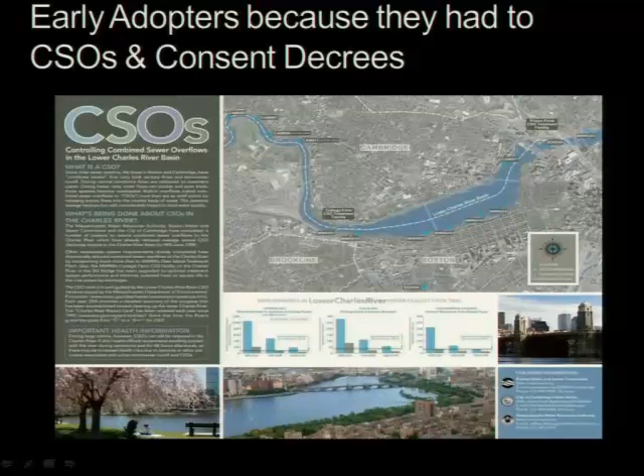People with CSOs and consent decrees are adopting our stuff like crazy, these bigger cities. We also have early adopters because they had to under strict stormwater permits. So Southern California, they can only drain 5% of their stormwater untreated back into the curb and gutter. Other early adopters are the Pacific Northwest and Bluffton, people whose economic development and identity are closely bound and pressured by stormwater.

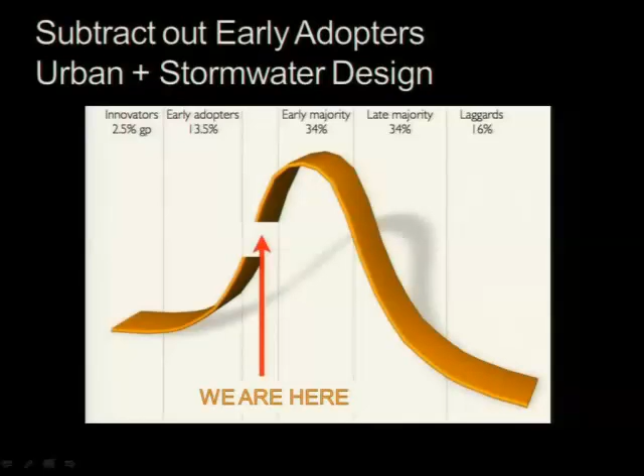So once we subtract out our early adopters, who do we have left? Well, we are at something called the chasm. We have got to cross the chasm. So how do we do that?

Well, the solar industry has already looked at this chasm, and they found out that after you subtract out the early adopters, their early majority is just like ours. They're more skeptical, more driven by upfront costs. So this life cycle analysis, forget it. They're driven by reliability, but they're more open to advice from peers rather than experts.

So what does that tell us about our early majority? Well, we need to find out that definition. We need to figure out what peer pressure is for this group of people, and we need to figure out how sensitive they are to cost. So when we poke them in that soft underbelly that's going to get them to go our way, where are those pressure points?

If we start defining who our early majority is, let's look at small cities and counties, people who are MS4s, but not necessarily big cities with CSOs and the bigger problems and the better grids and things like that. Well, they don't have a lawsuit to point to. They don't have consent decrees pressuring them. They may have Tea Party issues, and they're taking on sustainability, but they're also struggling with how you handle the communications of hidden benefits and avoided costs, but we all know that.

And they also have a habit of dumping their stormwater into the rivers for free. So this whole 'we're going to save you money' thing—what's less than zero, really? So we need to figure out new ways to present budgets, not just current year, but throughout the life of the project, because upfront costs are sort of our bugaboo. We need to find their peer cities and counties, and we need to figure out ways in our own communities to link runoff to our identity, because identity is a big deal.

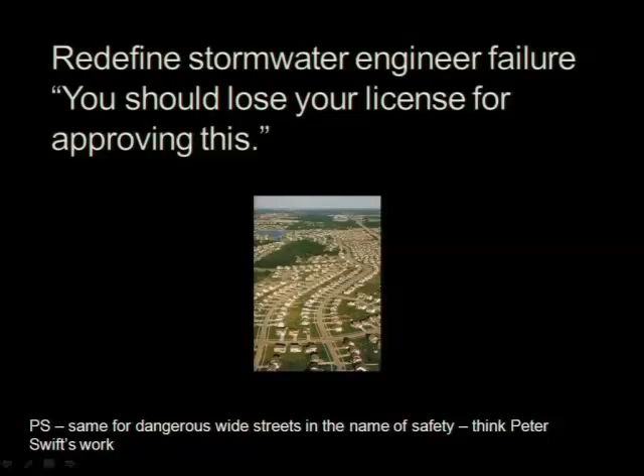The other thing that's really important since I moved to the suburbs is we talk a lot about champions. Mayors are champions. Once we go to our early majority, we are dealing with county boards and small city boards. They have 5 people. We've got to learn the politics of the 3-2 vote. We've got to stop relying on one champion.

Word to the wise: HOAs matter. We smart growth people don't like HOAs because they're kind of sprawly, but they matter, and they are hotbeds of innovation in Sarasota where I am. They're totally into peer pressure. They have huge maintenance budgets, and they're great for collecting data. But even though we talk a good game about politics, we still need the numbers, so we need things like Banking on Green. ASLA has a great case study bank, and we need organized information.

In case you thought you were missing tactical urbanism, I'm going to cover that here. This sort of thing begins to change the tone in the community. Stormwater is cool, and green stormwater is great. These little tags, guerrilla gardening, like pothole gardening, putting flowers in your stormwater grate so people all of a sudden pay attention to it. This is cheap promo for my other one. Talk to me afterwards if you want to, because I'm going to tee up Lynn, who is really going to talk about the policy framework for this next group of people that we need to come our way. That's it. Thank you.

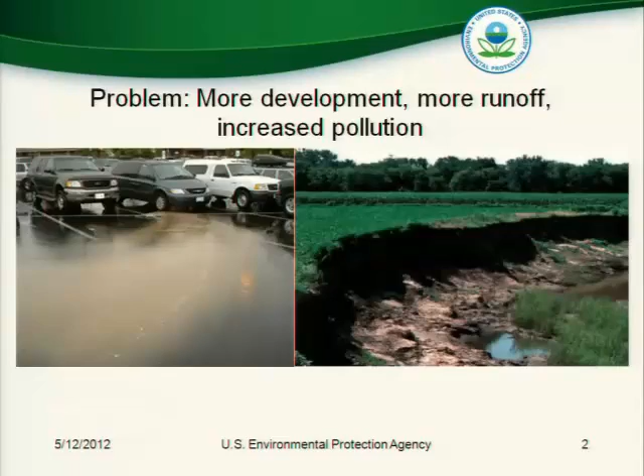As many of you know, EPA publicly said that we were going to propose a stormwater rule in September of 2011. The rationale behind it was simple. What we were seeing across the country is that the more communities developed, the more runoff we had, and the more increased pollution we had. With the increased pollution, it actually cost quite a bit for communities to begin to address it. So as part of a settlement agreement with the Chesapeake Bay Foundation, the EPA said that we would consider - pay attention to my words - consider a national stormwater regulation for new development and for redevelopment, right?

As part of this measure, it was looking at managing stormwater on site through green infrastructure approaches. What this rule is considering to propose is, one, getting the land use right. Let's start there. There are, I think, 50,000 abandoned lots - that was something Ellen Dunham-Jones said recently. If you put development on existing development, that is your number one water quality strategy. You're a mayor, you want to experience the benefits and opportunities associated with growth, right? But you are facing stormwater problems - direct your development to already degraded areas, right?

There are a lot of opportunities. As I already said, Ellen Dunham-Jones said there were about 50,000 of these abandoned strip malls and single-family malls. There are these freestanding malls. The GAO, the Government Accountability Office, estimates that there are almost 500,000 brownfield sites. This is prime property that already is served by existing infrastructure. If you come away with nothing else, the best water quality strategy that you can do is direct development to your already degraded places.

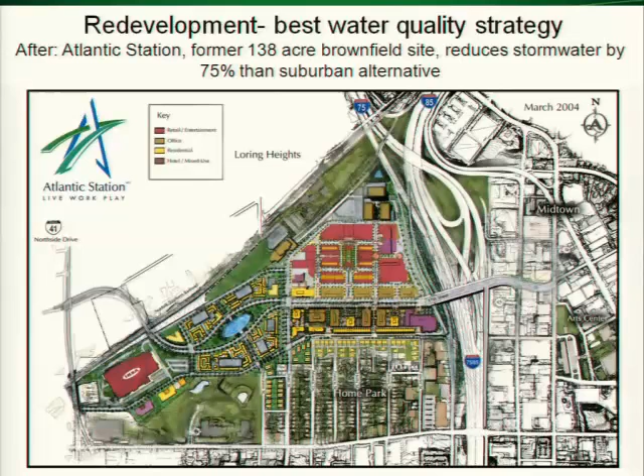So you're a developer, you're worried about your bottom line: that's 75% less stormwater management that you need to put in just with where and how you developed. So part of it, as we discussed, is directing the development to an already degraded area. The second part of it is how you're developing the site.

Compact mixed-use development further reduces your water quality impact, and it makes perfect sense. If you're consuming less land because you're creating a more compact development, again, you're generating less stormwater. If you do your mix of uses and you begin to weave in transit, you're reducing how much you're driving because you're increasing walking. Reducing how much you're driving, pay attention here, technical term coming up, you're reducing the amount of gunk that cars leave on the road.

Less gunk on the road means less gunk being washed off into the streams, right? Less gunk on the road, fewer cars driving means less air emissions that are falling into our water bodies. 1/3 of the nitrogen in the Chesapeake Bay is from mobile sources. In other words, we will never be able to get to the levels that we're trying to in the Chesapeake Bay unless we start driving less. How do we start driving less? We start building communities that are walkable, mixed use, and are on already degraded sites.

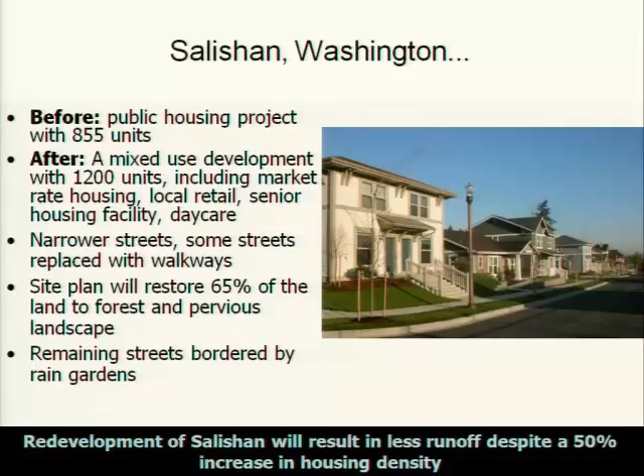And there are a lot of examples. This is a project that I did in Covington, Kentucky, northern Kentucky, right on the other side of Cincinnati. They were facing a consent decree. So Covington came to us and said, how can we sustainably grow? How can we grow our economies when we have to dramatically reduce our runoff? And what we first said is get the land use right and then green the heck out of it. Just another example of the types of tools that you can begin to integrate into your development.

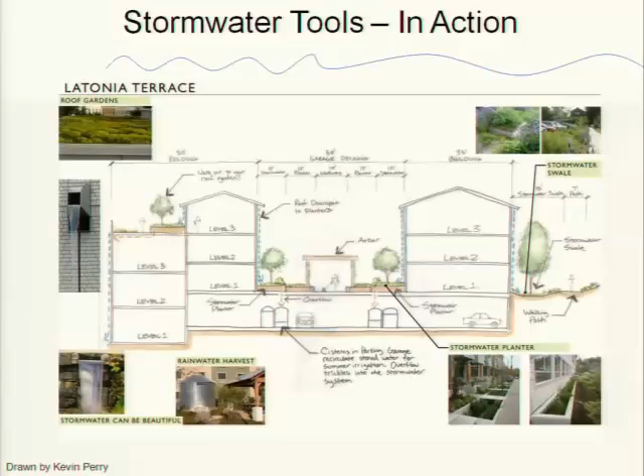Again, the rule is going to propose that some percentage of your stormwater will need to be managed on site. And so we'll really be able to draw from the wide range of work that has already been done. But as I said, the rule was supposed to be proposed in September of 2011. If you look at the website now, we're in May 2012, it said, look here shortly for a new date of when the rule will be proposed.

So step back for a minute and imagine that you're the President of the United States. You're Obama. All right, you're in the White House, and the housing industry is in the toilet. You need to worry about the economics of this country. And last year, your Environmental Protection Agency had just put out a construction and development rule. So any additional regulation that will cost the development industry something is going to make headlines and is going to hit the economy. Just look at it from Obama's perspective. So from our perspective, the EPA, what that means is that our cost-benefit analysis has to be even tighter. And that's what's taking the time. That's the rulemaking process.

But what can we do in the meantime? Let's go directly to what Lisa was saying. Well, let me back up. So once the rule is proposed, it's probably going to be another year, 18 months while we take in comments, and then probably another several years before it's finally implemented. So from this point on, figure 4 or 5 years before we get implementation. So what can we do in the meantime? We can change state standards.

Virginia and Tennessee have both modified their state standards to adopt the very type of permit that we're considering at the federal level. And in fact, they'll be exempt from the federal rules because everything that they've proposed is already stricter than the federal standards. We can plan where and how we want to grow. This becomes really important when we know where we want to grow.

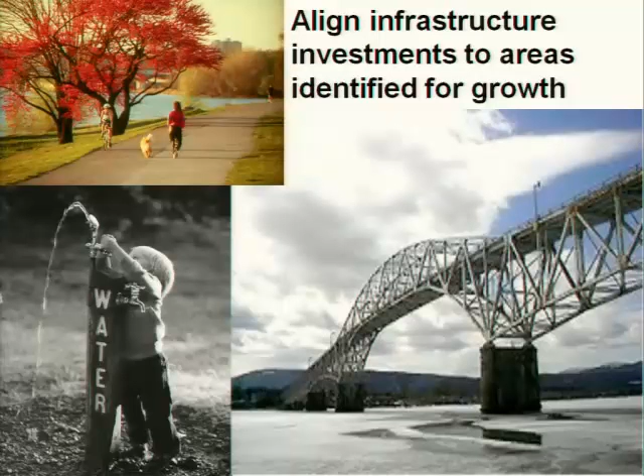Now I've got to wrap up. When we begin to align our infrastructure investments, we figure out a way to begin to integrate our infrastructure. And a great way to start integrating our infrastructure is how can we use our transportation street network to start managing our stormwater. The city of Emeryville, they didn't change their codes, but they did establish guidelines on what new development needed to look like.

We could also begin to change our codes. Again, code for parking maximums, code for narrower streets, code for mixed use, code for redevelopment. These all have dramatic water quality outcomes. And then finally, get the land use right, green the heck out of it. We need to add texture. Stormwater management is something that can actually be beautiful and add texture and distinction to our communities.

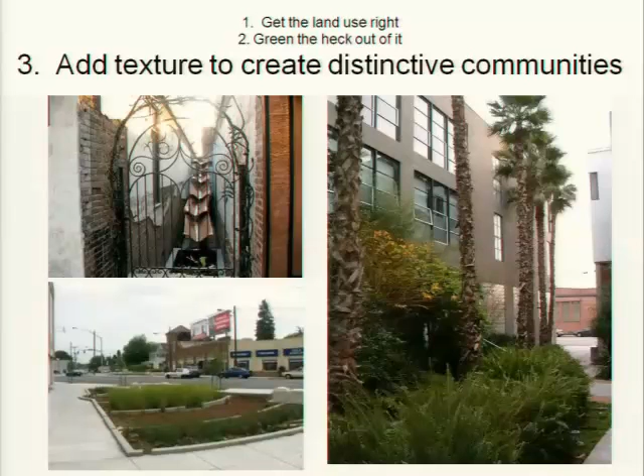And when we begin to do that, when you can see it on the street level, you begin to value it. When residents value it, the local governments will invest in it. When local governments begin to invest in it, you begin to do it more. Which kind of goes back to my opening statement: if we begin to do this and people begin to invest in it, do we really need a stormwater rule? Done. Thank you.

So I was the first person to go over. I think you owe Lisa the beer now. I do. And it's Steve Coyle that is next.

Okay, so my name is Steve Coyle. I'm an architect. I'm not an expert in stormwater, but as an architect and urbanist, I need to know enough about this so I can have a positive impact. So I'm going to briefly talk about an EPA greening grant project that's in the Southwest, specifically in Phoenix, and the whole Southwest, as you know, is trending to reduce water. They'll have less water to work with in the next 50 years.

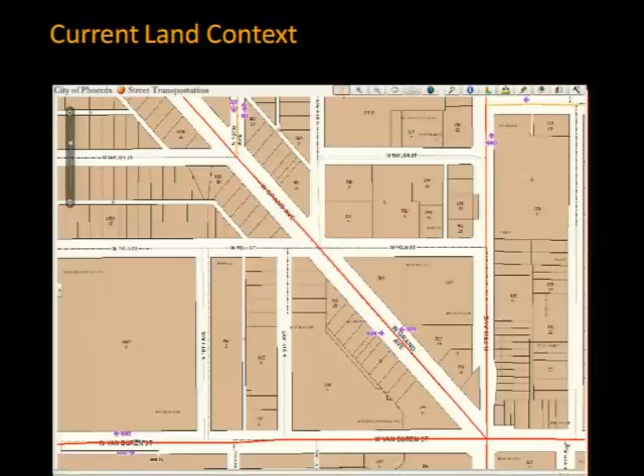This is the area here, Lower Grand Ave in Phoenix. It's a couple of miles of arterial, and as part of the greening grant, we did a 3.5-day charrette that I led, and you can see the evolution of the design of the streetscape, and here's what it looks like, the context. It's one of the older routes that crosses I-10 to the northwest, and then it joins Van Buren and 7th Ave in Phoenix, for those of you who know the area. So our section is a relatively short stretch of what some people call a corridor of crap, but it's a vital link both for mobility and economically.

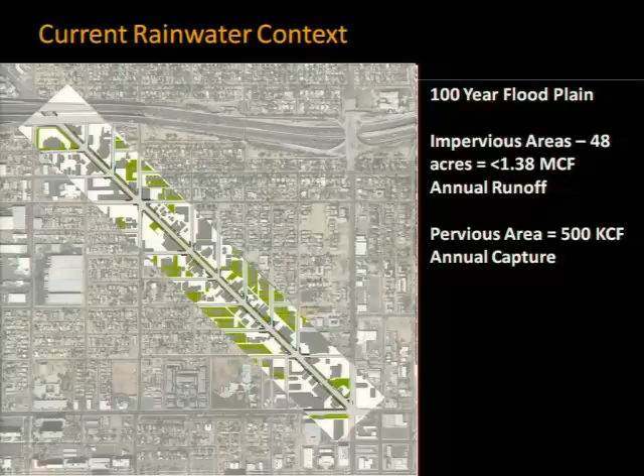And here's some of the rainwater information. So you can see some of the existing infrastructure, the massive infrastructure. Most of it is surrounding that corridor, and here it is. Here's the 100-year floodplain, you can see in the light blue to the left of that photo. Here's the impervious area, about 48 acres of impervious area. Some of it buildings, but most of it surface paving, parking, and so on. And then the pervious area is only about 500. That would be 500,000 cubic feet of annual capture. So you can see we have a deficit of pervious area and a predominance of impervious area.

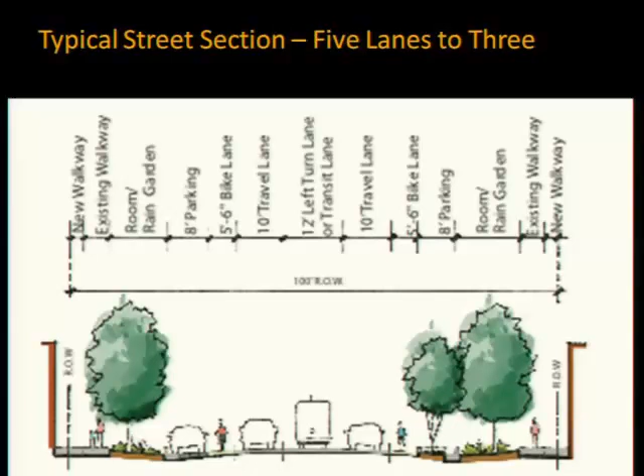So we're trying to green or to improve the streetscape, but also we're trying to handle stormwater. So the first move is to go from 5 lanes to 3. As you can see here, we did it without really reducing much the capacity, the throughput capacity, because it's mainly throughput. There's not many right or left turn lanes. So the thoroughfare design goes from this to something like this, going down to 3 lanes.

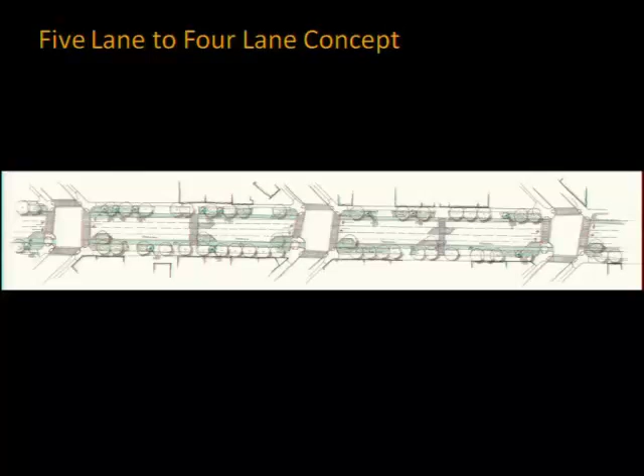And so going from the northwest at the I-10 to the overpass to the southeast end, I just wanted to show you the streetscape. So here what we've done is we've added street trees, rain gardens, bioswales, and we've reduced paving significantly, especially that centerpiece, which doesn't exist now. So what we're trying to do is really reduce the amount of overall impervious surface. The typical street plan is adding street trees, adding these rain gardens, and reducing paving by removing 2 lanes.

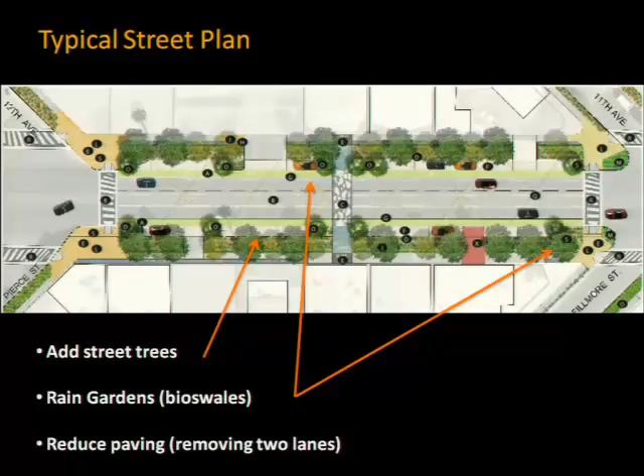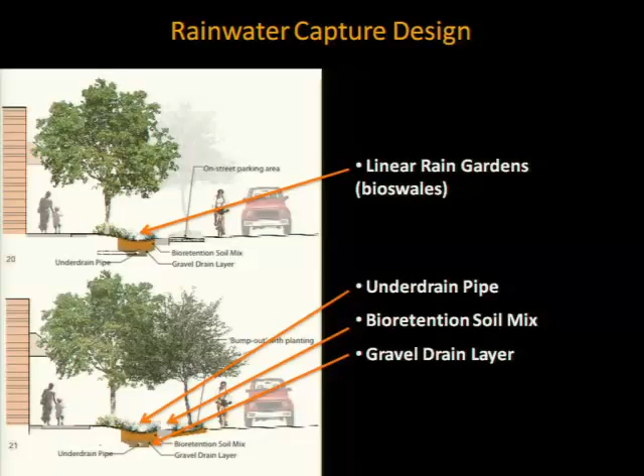So this is very simple. I mean, this is not gold-plated. This is a basic approach to moderate cost rainwater capture. Rain garden design here. What we've done is design these linear capture areas with on-street parking and a bike lane. And the capture design consists of these linear rain gardens, under-drain pipe, and a bioretention soil mix. So pretty standard stuff for many of the arterials, particularly in the southwest. We also use a gravel drain layer at the base to help the infiltration.

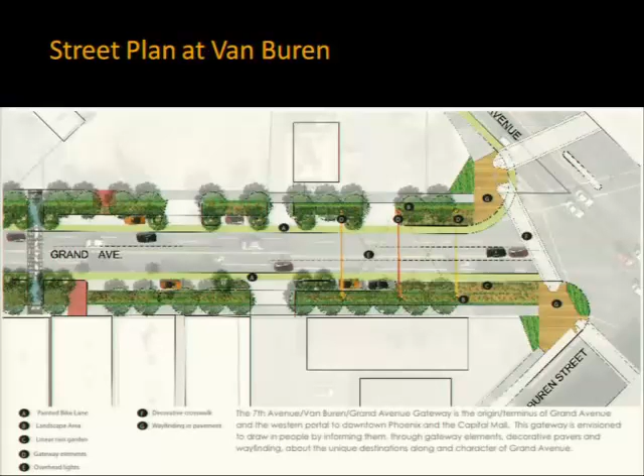A typical street plan at the intersections looks like this, where we've gone from essentially a giant paved area at the intersections, and we've tried to introduce or extend those capture areas towards the intersection. And then when we get down to Van Buren, which is that giant intersection, we've done the same, tried to introduce more capture area, more greenery, and at least try to provide some decent presence.

I'm an architect. I'd like to do it with buildings, but the buildings are not going to happen yet, and it's this incremental growth. So we've seen that private investment follows capital investment. So hopefully, by greening the street, we improve the capital investment, extending the sidewalks, and some lessons learned from this. That little cartoon says it's not what you think. The idea is collect rain before it reaches the car park.

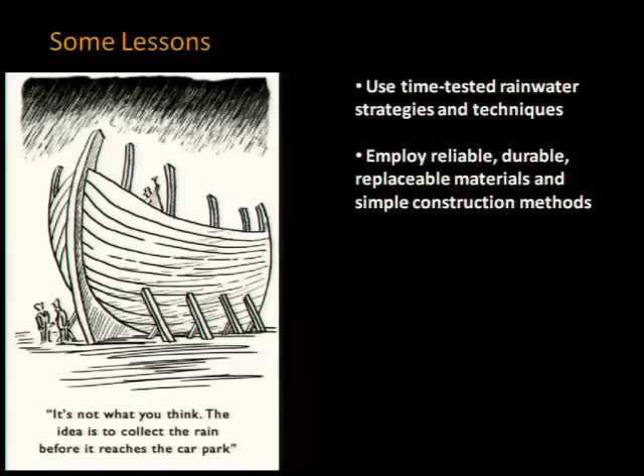Anyway, so we're trying to do some very simple, pragmatic solutions using time-tested rainwater strategies and techniques, employing reliable, durable replaceable materials, stuff that if it gets damaged can be replaced easily, and simply making the designs adaptable for future modifications. So if you have some intensification of uses, removal of curb cuts, you can make those rather easily, and make designs that address more than one issue. Just those rain gardens, they reduce heat island effect, they capture rainwater, and they're nice to look at.

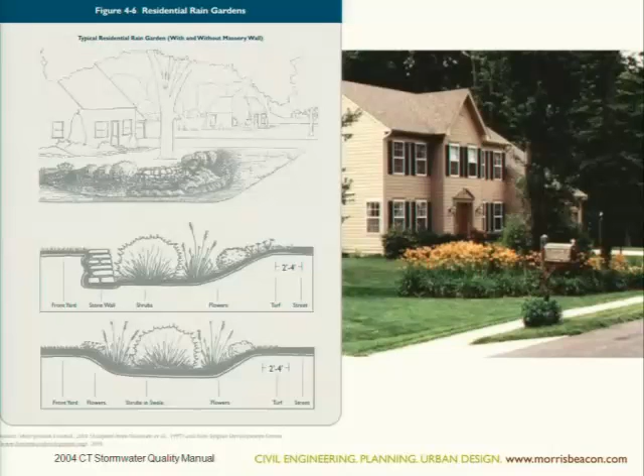LID, we see you manifested in the bioswales and bioretention, the rain gardens and rain barrels, the perforated pipe and the pervious pavement, the green roofs and the greenways. Perhaps more important, over time you infiltrated the regulatory system, creating a legacy in the stormwater manuals and design guidelines now being enforced.

Where LID is the core guiding principle for developers and designers to tread lightly on the land. Shown here is a greatest hits list from state stormwater manuals in New England. LID, we were so proud.

But the time has come for the next generation to evolve and grow from your foundation. It's not entirely your fault. In recent years, you associated yourself far too much with some unsavory characters like sprawl.

Shown here, a layer of LID technology over the same old land use patterns, straight from the New Hampshire State Stormwater Manual. And LID really hit it off with conservation subdivisions. You gave us transcendent solutions such as going from 2 cul-de-sacs to 1. Here, from Rhode Island's brand new 2010 State Stormwater Manual, as a solution for laying light on the land.

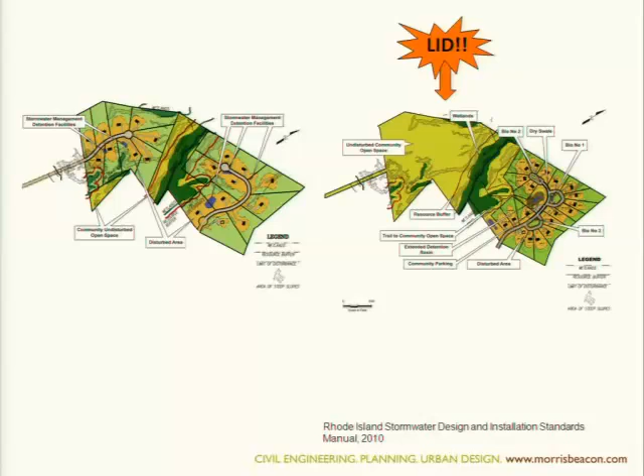We're facing a new world these days, where smaller scale infill and redevelopment within our existing walkable places offers both a market-driven and environmentally sensitive solution, and one where the banks are returning the developers' phone calls. LID, this hasn't been your strong suit, but you never were really given a chance.

Similarly, your principles haven't evolved, or maybe haven't been properly expressed, to embrace the case for density and development patterns as the ultimate stormwater BMP. God forbid we mention Manhattan and watershed health in the same sentence, but we know the proven benefits of density for watershed health. LID, you were misunderstood.

You never had the chance to grow up. Rather than focusing on the typically expressed site-by-site LID tenet of reduction of impervious area, we need to move towards understanding that not all impervious area is created equal. We know on a per capita basis that increased density leads to decreased watershed impact.

We know the watershed and infrastructure cost benefits of more development intensity utilizing less impervious area. These are numbers many in this room are familiar with and many have helped to generate. But as we know, the big picture approach is easier said than done, and requires a watershed level analysis to define and reinforce growth centers, while also requiring the accompanying natural preservation.

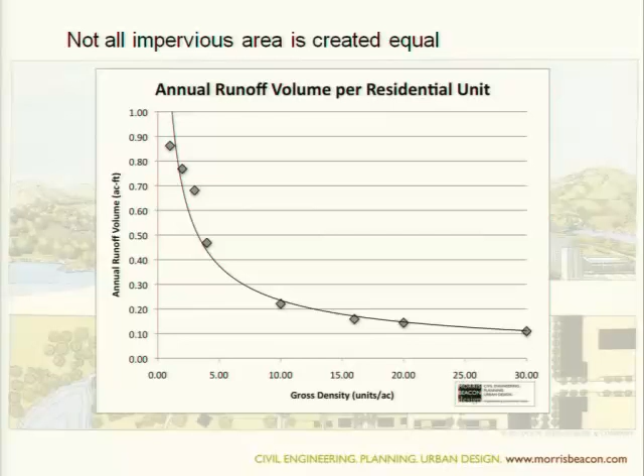Again, LID, not your strong suit. When it comes to design, LID, you never really got to know the transect. You should have been best friends. But again, it's really not your fault.

Your one-size-fits-all manifestation against the backdrop of suburbia was a beginning towards healing the scars of the old pipe and pit methodology, but it's not enough. It's our fault, really—the antisocial engineers, whether by training or inherent personality, never really absorbing the world around us to understand the character of the built environment, the variables that describe great, vibrant places, and how engineering should serve the character of the urbanism with a nuanced, context-appropriate response.

Instead, the treatment train is driving the bus. It takes extra thought and negotiation, but we know the right contextual solution can be permitted and built, very often cheaper. This is especially difficult within my New England post-industrial context, where almost every site is contaminated with no overflow to combined sewer allowed, but the retrofit opportunities are huge.

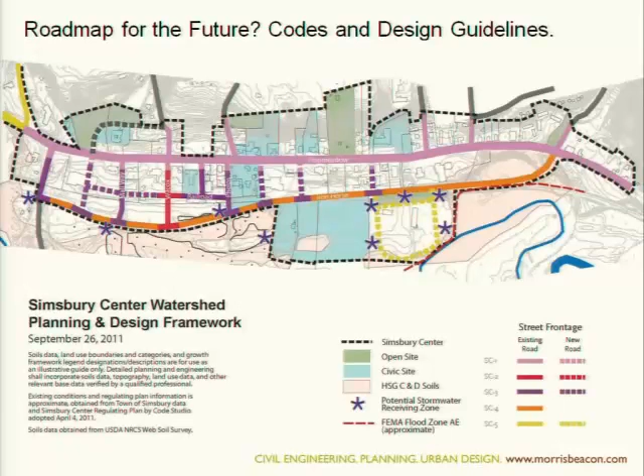So what's the future? What do we as agenda setters need to do? How do we set a new framework that values our existing walkable places, already doing their part for watershed health with walkability alone, but able to do more when properly integrated with the LID toolkit?

Can we as engineers call ourselves urbanists, civic builders again, and take what we've learned from our studies of place, character, context, and vitality, and understand how we can rewrite rules to support growth and great places in balance with nature?

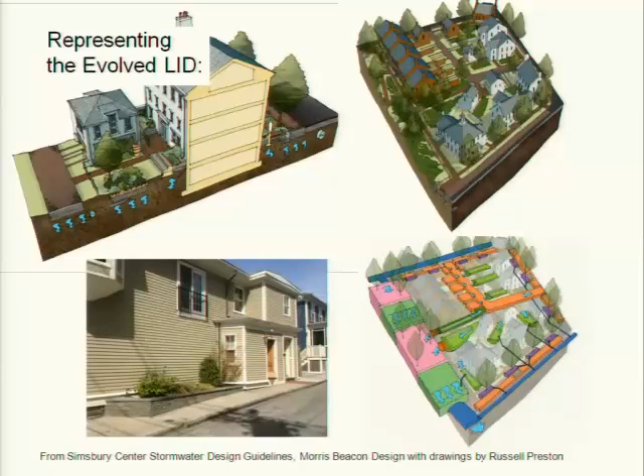Can we use watershed analysis to make the case for and enable walkable density in our form-based codes, and demonstrate how stormwater management should work to elevate vibrant, lovable, walkable places of various scales and characters? Can we redefine the examples in our manuals and design guides, evolving the site-by-site, one-size-fits-all approach to provide appropriate cues and inspiration tied into today's development reality?

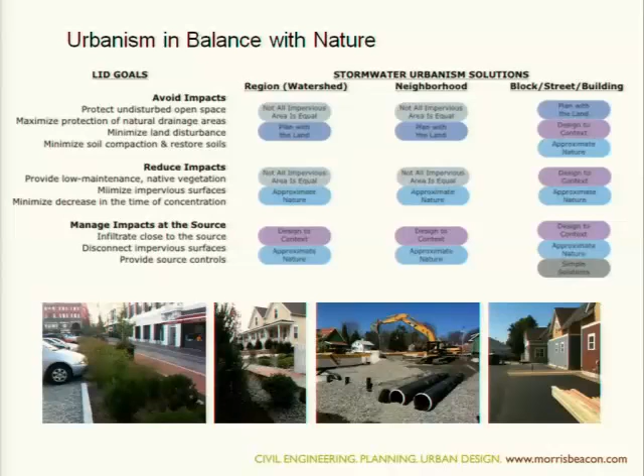An evolved framework built on the ashes of LID should incorporate density as a stormwater BMP, where not all impervious area is created equal. Context above all: recognize and encourage incremental gains, and advocate for lovable, simple, cheap, easily monitored, easily cared for infrastructure. Which brings us back to our remembrance on this mournful day, as we thank LID for establishing the building blocks of an evolved approach, where each LID goal can be addressed in a more valuable way, using codes, context, calibration, and creativity. LID, RIP.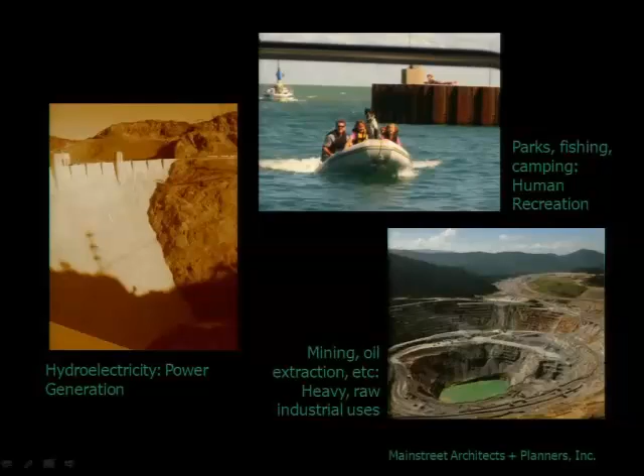Of course, we use water for agriculture, to grow food. We use it for cooking, we use it for washing, and so on and so forth. Recreation, we use it to generate energy, electricity. And we use it for a lot of mining or extraction, fracking anyone. Of course, water is also used to manufacture everything that we see. In fact, when you look around you today, every product that you see has to be made with the use of water.

Now I just want to give you some statistics about the situation of water. Our nation has a big thirst for water. And it's not just a matter of how do we recollect water from the rain, but also how do we minimize our use to begin with.

As an example, Mono Lake, between 1941 and 1982, lost 31% of its surface area. So we're talking about a 40-foot vertical drop. The average household water usage in our nation is about half an acre-foot of water per year.

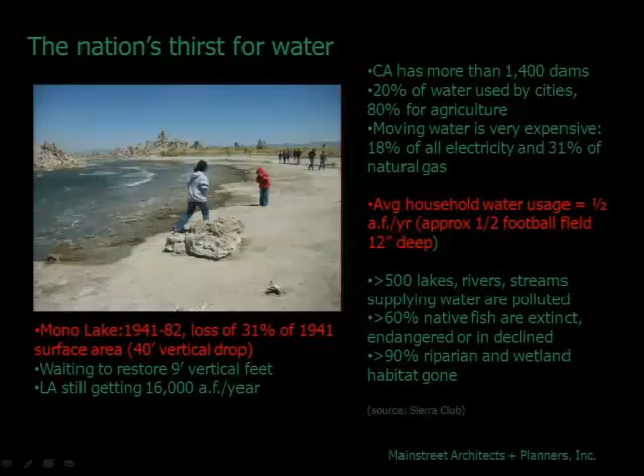So, where does the water come from? Here's some very sobering statistics to share with you. Only 0.0014% of the world's water is really available for human use.

And yet, even with that, about 1.1 billion people do not have access to clean water. And there's no new water—there's none available to create. Yet population keeps growing, mostly in poor countries. So there's a linkage with climate change.

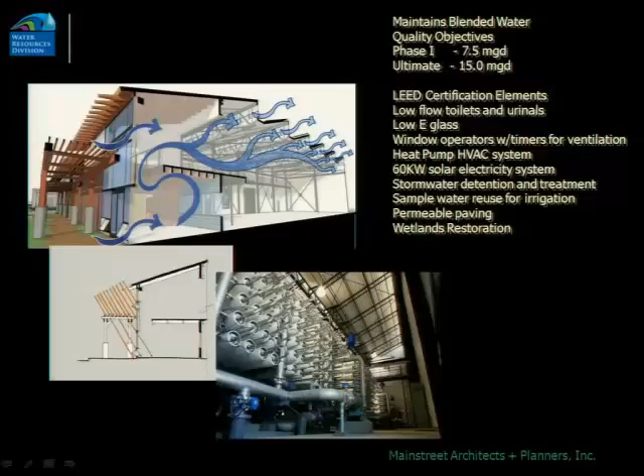This is another project also for the city of Oxnard. It's kind of unique in the sense that there's also a restoration and demonstration wetland project as part of the architecture project. What it does is it takes the effluent out of the treatment center, treats it again, puts it through a series of filtration, and the water that comes out would be clean enough for people to drink, even though we don't have the permit from EPA yet to allow it to be sold to people for drinking. But at least it can be used for irrigation and agriculture.

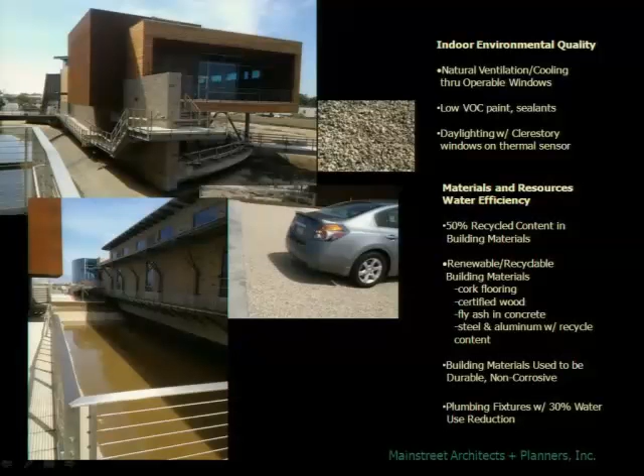Of course, the building includes a lot of green approaches, green technology, including solar panels and natural ventilation. For the parking, we use permeable gravels to allow for better infiltration of rainwater. Even though that process will use quite a bit of energy, it's still better than importing water from the delta of California. So we have some backup scientific data to prove that, and it would also have a lower carbon footprint.

This is another project that, in fact, Paul Crabtree is also part of the team for, for the city of Thousand Oaks. We're designing a new municipal services center, and we're applying all the kind of strategies that Steve touched on earlier.

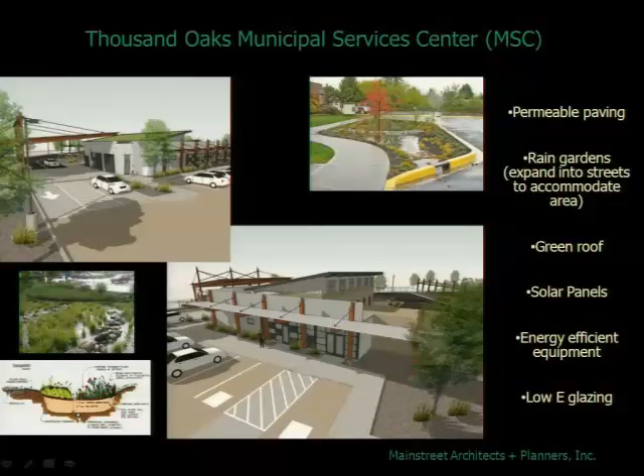But here's a question that I would like to raise: is that all there is to it? I think there's a tendency to rely too much on technology. Technology is fine, it's great, but we need to be more aware of other ways of approaching that. For those of you who deal with the Clean Water Act, we know how challenging that is. Regulations can be pushed around by different self-interests. As Lynn can probably attest, it takes a long time to get regulation implemented.

So what I would advocate is a culture of planning ahead, a culture of proactivity. We need to understand the limitation of technology and rely more on common sense. Every issue can be very nuanced and complex, and we need to understand that we need to rely on choice and diversity. So I created for myself a sort of 7-step plan: a culture of planning ahead, plan to preserve natural resources, plan for better sustainability in the natural and human realms. Everything is interconnected.

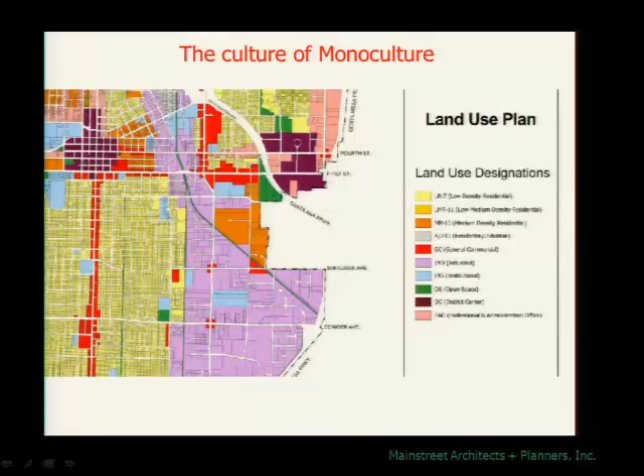Okay, Grant is next.

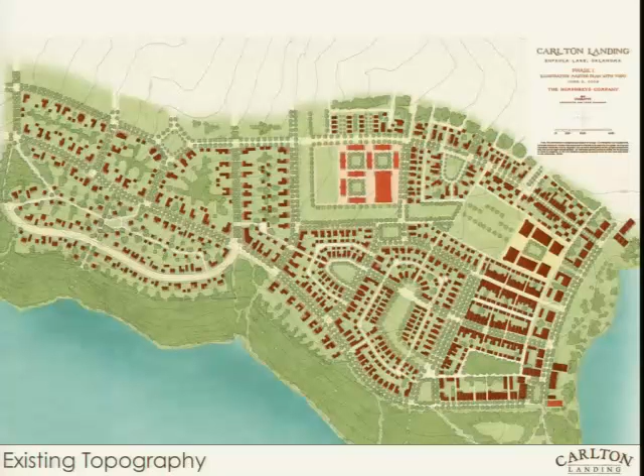Quick overview on the approach that we took putting together the light imprint. Phase 1 area here shows about 150 acres, and most of it's 3 to 5 degree slopes, so it's good for stormwater drainage.

We reviewed the topo maps and physically walked the land and identified existing drainage patterns. Orange lines are the ridges, blue lines are the troughs, blue arrows are the natural flow of the water. Typically there's no site grading in the way that we're developing the land because we're using pier and beam construction, stem walls, and footing system. And so these natural creeks are important to see how the water flows.

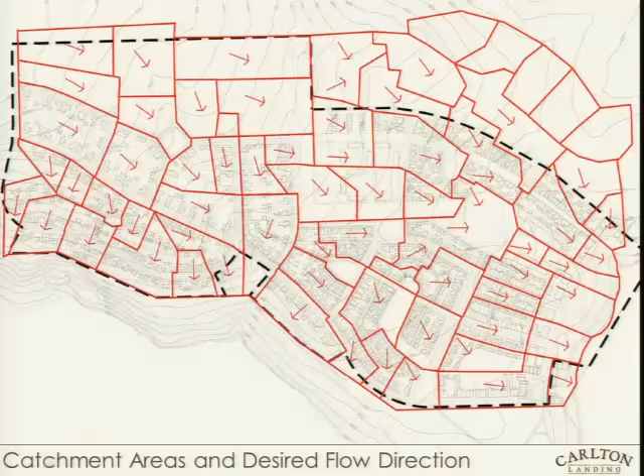From that, we put together this map that shows the catchment areas. This is 2 to 5 acre areas. This is how you'd approach it on a greenfield site. Urban infill site could be site specific, but on a larger master plan context, this is what we did.

The next 4 slides show some of the tools that we used in the toolbox. What I think is so great about the light imprint approach—and Tom's book is available at the bookstore—it provides a matrix of calibration depending on the transect, so you can look at the transect, the soil conditions, the soil slope, the amount of money you want to spend, and the level of maintenance that you're required to pick up. And it will give you tools in storage, channeling, paving, and filtration.

In channeling, the area that we have in Oklahoma has a very intensive weather pattern. We can get 3.5 inches of rain in a 30-minute storm event. So you're looking at something that our civil engineers initially pushed back on, saying Tom's a nice guy, he's from North Carolina, they get these nice kind of soaking rains out on the East Coast.

What we have here in Oklahoma is a very intense flood event, and I don't know if this can really help. What we ended up doing over the course of time is proving them wrong and showing that the light imprint approach works for areas of more temperate climates, but it also works for areas that are more intense.

We've also found that the light imprint is easy to adjust. With a pipe and gutter system, everything's encased in concrete, it's underground, and therefore it causes people to over-engineer—if you need an 8-inch, you put in a 12-inch. What we found is since everything's on the surface, it's a guy with a shovel, and you can calibrate it. You can stand back, wait till the next storm event, and see what's going to happen.

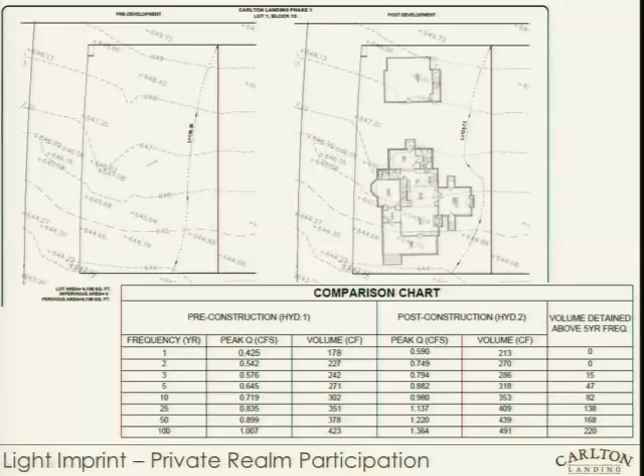This is a private lot, and what we did is we looked at the pre-construction stormwater runoff requirement and then how it was going to be affected post-construction. So we share the load between the private realm and the public realm, and actually have a stormwater light imprint mitigation requirement as part of our design review. It varies from T3, where about 100% of the mitigation can be absorbed on the site, to a T5 area where we're at about 20%. We transfer the load, as you can see here, into the public realm.

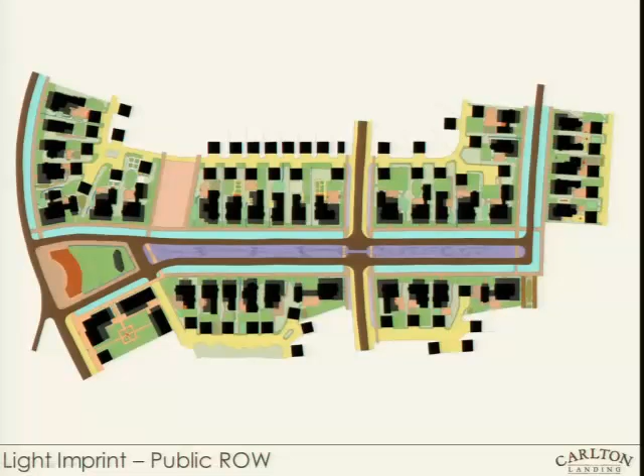We'll look at this boulevard here in a minute, but some of the stormwater conveyance in the median there is all on the surface—it's aesthetically pleasing, people like to look at it. And it's a place where, in a storm event, instead of everything just going underground into the largest detention pond, it becomes a thing where the kids can play in the water. You can see how the system's performing, how it's functioning.

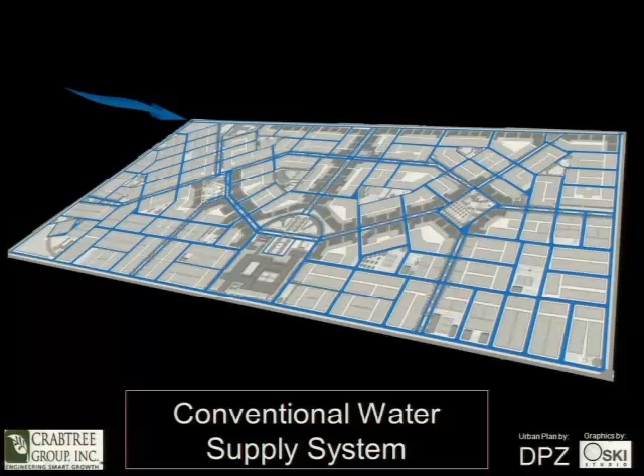So the first thing in this proposal is that the treatment plant is located near the site, and then the water, once it's treated, goes back to the project and is used for toilet flushing and for irrigation.

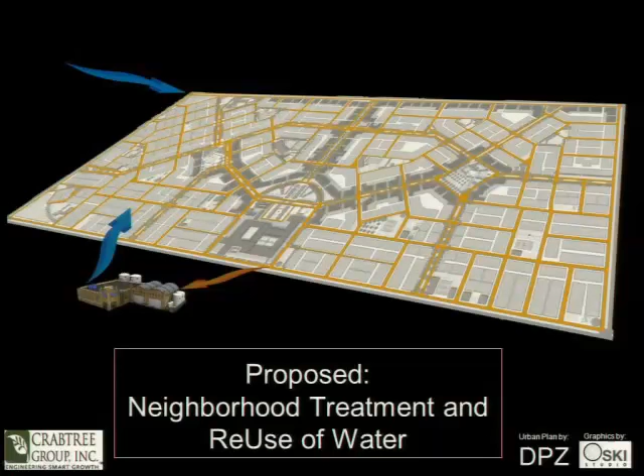And that's in a dual pipe system. So first of all, the potable uses are for drinking, cooking, showering, and sinks, and that'd be in one set of pipes through the community and to the building. And then once those are used, they go back to the treatment plant and the water gets treated.

Then for the non-potable water, that gets recycled actually a couple of times, because once it's... here we go. This cycle actually happens a couple of times with the same water, because it gets used, goes to the treatment plant, goes back through the toilets and laundry, and runs through there.

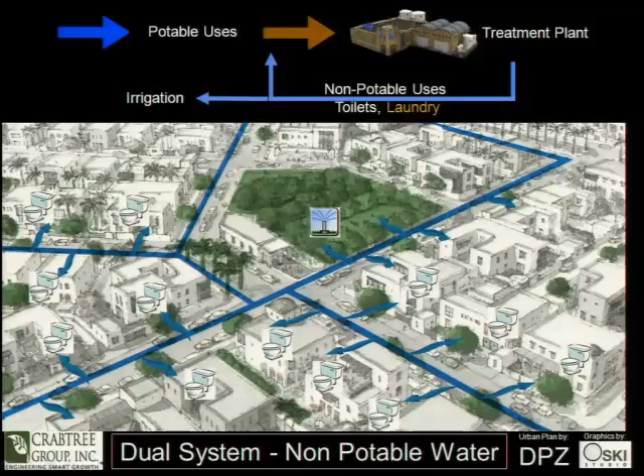And that cycle in itself, the dual pipe system, results in a 55% reduction in use of the desalination water.

So the next part of the system, and this is where we've joined community rainwater harvesting with a dual water system, is what you could call a rainwater harvesting street. It's basically a V section. All of the rain, and this is a typical section, but of course there are several V sections for the entire community, they vary in width depending on the context or the T-zone, but all of them collect water both from the buildings and the lots and from the streets, and it goes to the center.

And this is actually a French drain, so it gets collected in a bioswale here. It could then overflow into this bioswale and then infiltrate into this French drain.

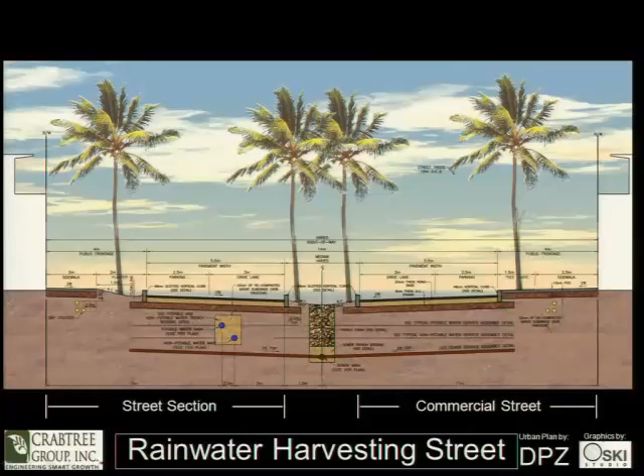This is another view of it. The utilities are highlighted a little more, the dry utilities on each side. This is the dual pipe, one potable and one for the reuse. This is the French drain, and this is the wastewater sewer line. There are no stormwater sewer pipes in the system.

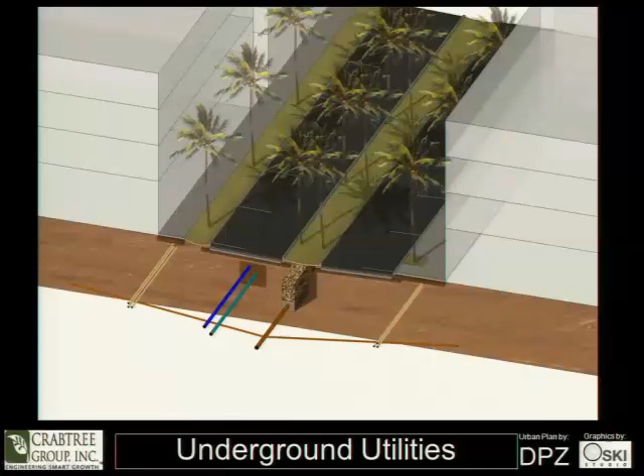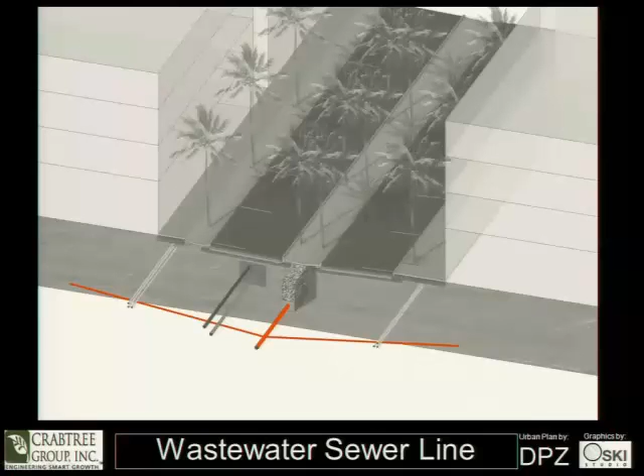So there again, the dual water services, both in the same trench, and that provides a cost saving. There's the dry utilities, the wastewater, and the French drain. And there's a couple of reasons that the French drain is located there, because in the construction sequence, you start at the bottom and you build the deepest part, which is the sewer main.

Then you've got an open trench, and rather than just filling it with compacted engineered fill, you make a French drain out of it. So you've basically got a free trench already, and you're just filling it with a different kind of material, and now you've got a French drain, which is actually an ancient rainwater management practice.

So the other interesting part of this is that that French drain follows the sewer mains and actually goes to the treatment plant. So you have an added benefit that a lot of it will infiltrate and recharge the groundwater, but what doesn't goes to the treatment plant and then goes back into the reuse system.

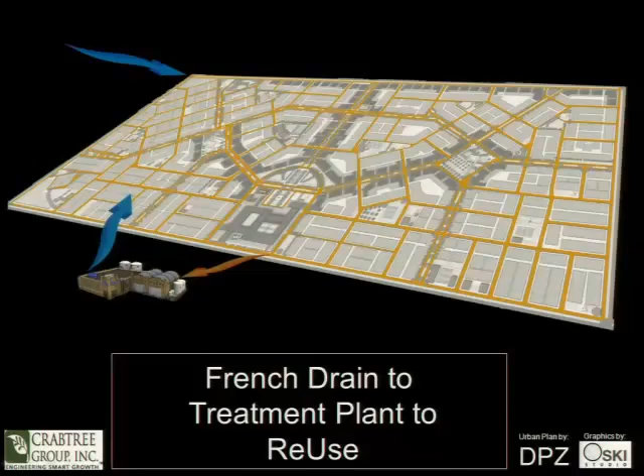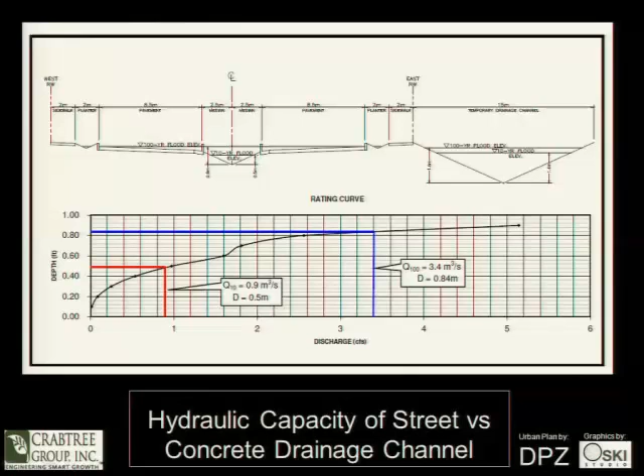And in this area, it's really important. The groundwater recharge is important because the Zamzam well in Mecca is an important religious site, actually, and they need to make sure that that continues to produce. And this shows the hydraulic capacity of the streets versus a concrete channel. So in this system, this is not required. The streets themselves carry the 100-year event.

And then this is the cost comparison. This would be the cost of conventional storm sewer pipes and inlets. And sorry, this is in metric and Saudi rials, but the comparison there is for 5,000 meters of street. The rainwater part of it would be 6.7 million Saudi rials. And with this system, it's 1.1 million. So a tremendous reduction in cost while being able to accomplish rainwater harvesting.

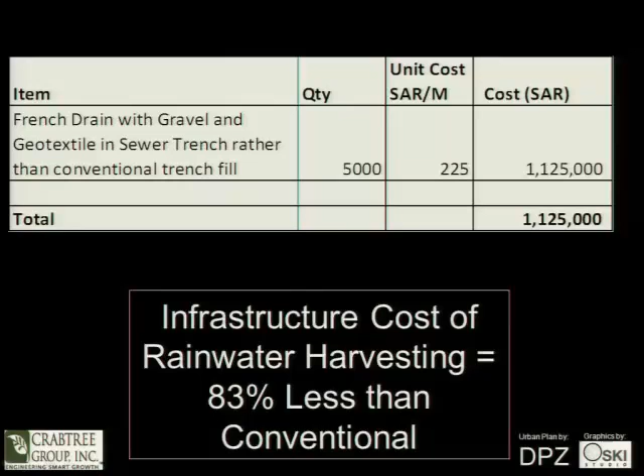John, can we blow out the candle now? No, leave it going on.

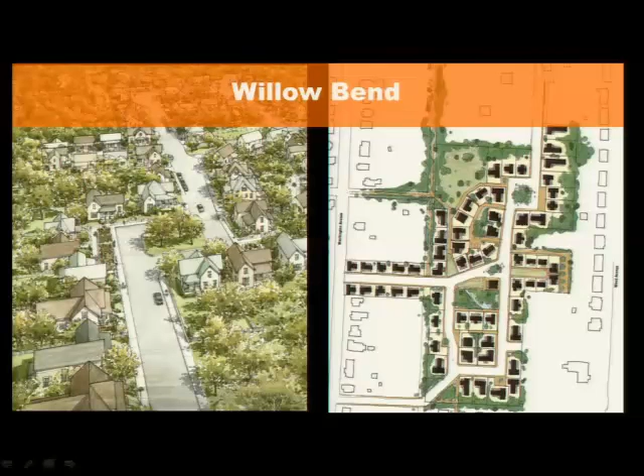When the project kicked off, because of the low-impact development manual, there was a lot of excitement around LID, and so when we got into the master planning, we had to really give it an extra effort to implement the placemaking principles first and then come in and implement the LID later instead of the vice versa approach.

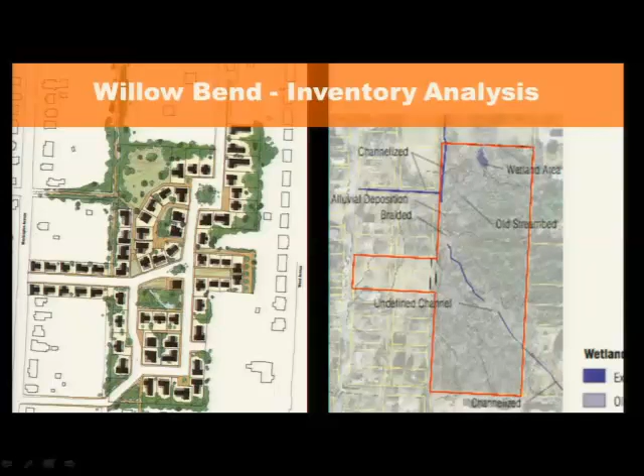The existing site at Willow Bend presents us with numerous different natural features that help shape our master plan. It's a flat site. There's nearly 100% canopy that covers the site. There's a 50-acre drainage way that traverses the site. Part of that drainage way has been relocated to one of the property lines, leaving behind an old stream bed and a small wetland. The runoff from development over the years upstream has not treated this drainage way very well. It's not in very good shape.

So again, what we wanted to do with the master planning was put placemaking principles first, and at the same time incorporate the big picture stormwater features that the site has to offer into our plan. Once we've done that, then we can come in with the stormwater overlay and look on a more microscopic level at what we can do to improve the stormwater quality running off the site.

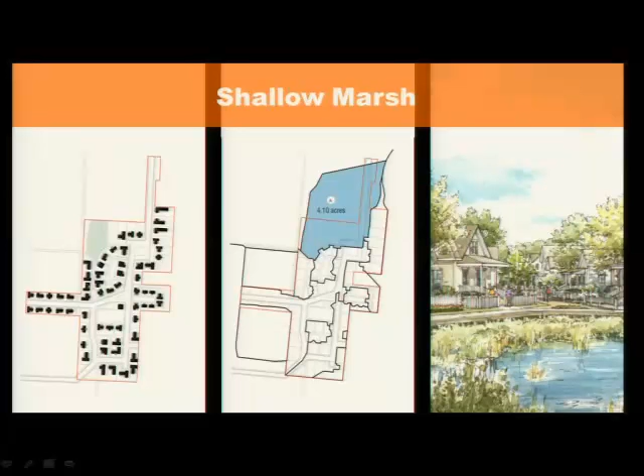There's just some different elements of our stormwater overlay. We programmed the space between the old stream bed and the new channel with a shallow marsh, a slightly raised boardwalk, or boardwalk street, if you will, that leads you from the shallow marsh.

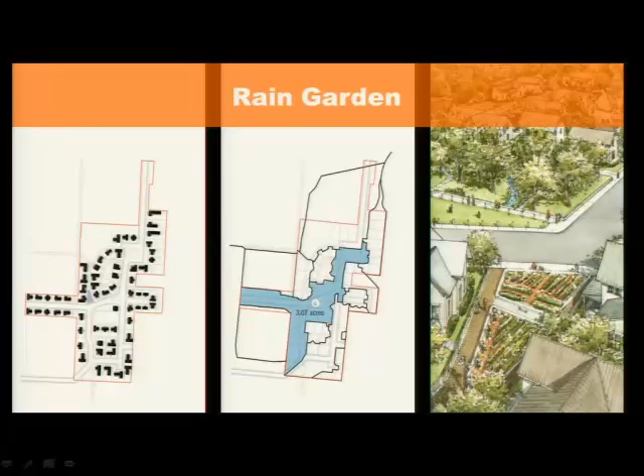We tried to put together a design that has an infiltration trench below that boardwalk so the water can drain to it and infiltrate into the ground. We programmed this pocket space with a fairly large rain garden. Our central green was primarily located because of the location of that existing drainage corridor that I was telling you about. We programmed that with a flowing park.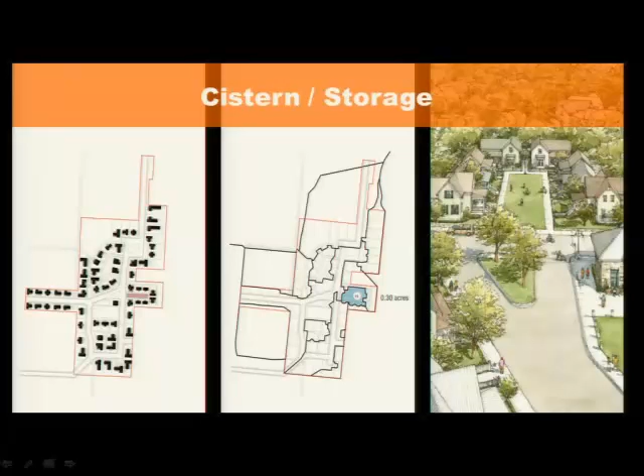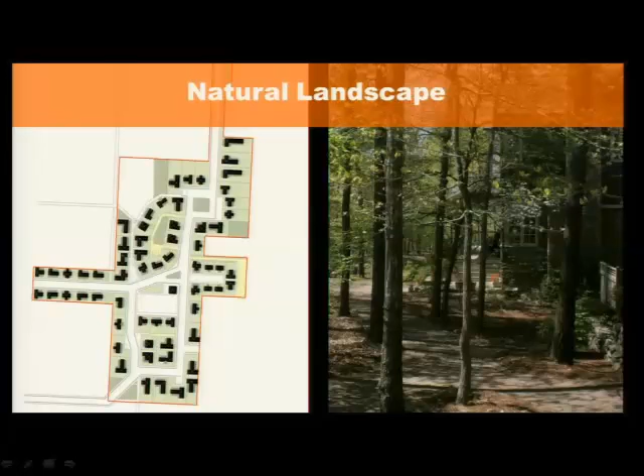Our bungalow court, we programmed that space with either an above ground or below ground cistern to store the water for reuse. Instead of doing the bioswales, we thought it would be more appropriate, because there was so much tree canopy on site, to use curb and gutter to really make a compact street cross-section. Permeable pavement, so gravel in the alleys and parking courts. And then we're planning to use pier and beam construction for the homes to minimize impact on the natural landscape of the site.

So the LID manual is still in draft format. It's open for public comment, but the basis of the city's approach is 80% rainfall capture. And this is the volume that's equivalent to the capture and removal of a 1-inch storm event. Another way of looking at this is that the city's goal is to not allow you to have any more than 20% runoff from the site. It's a pretty simple calculation. It's based on ground cover. Your undisturbed soils, depending on soil conditions, have 4% runoff, disturbed soils 20%, and then of course impervious cover is 90%.

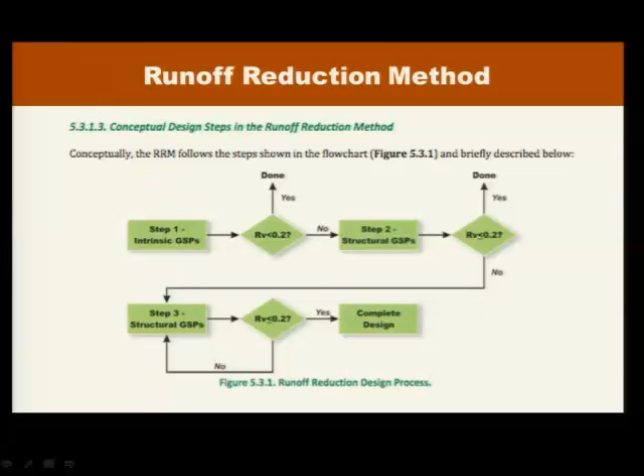This is interfacing our stormwater overlay with the LID manual. Starting out pre-developed, the site's all undisturbed, so we have a 4% runoff volume leaving the site. You add the streets, it bumps it up to 23%. Add the rooftops of the homes, 42%. Add any undisturbed soil that we've disturbed during construction, and it increases it all the way to 49%. So according to the manual, we need to find a way to reduce this by 60%.

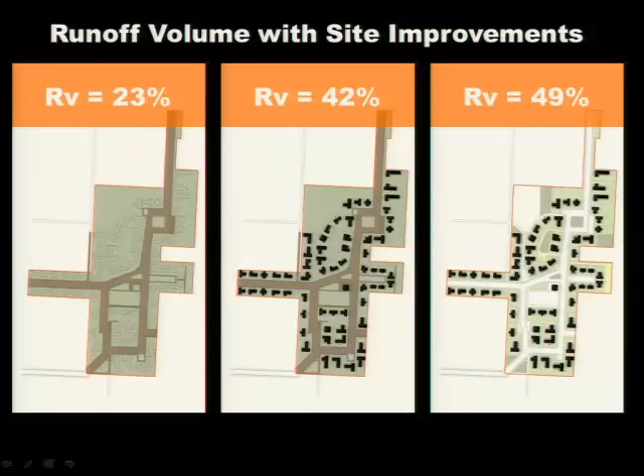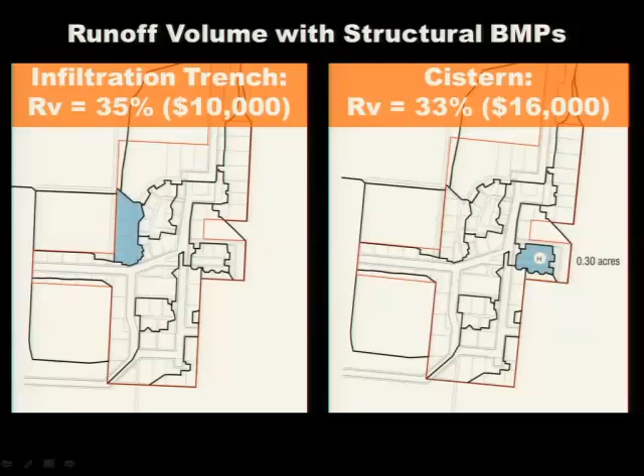So we look at a stormwater overlay and what techniques are allowable in the LID manual. We put in place the rain garden, which reduced the runoff volume down to 39%. Permeable pavement reduced it down to 36%. An infiltration trench, 35%, and then the cistern reduced it on down to 33%. So we're draining 5.5 acres of our 10-acre site into BMPs that are allowed or suggested in the LID manual, reducing the runoff volume from 49% to 33% at a cost of approximately $100,000, which is 5 to 10% of the overall site improvement cost. Obviously, the city's requiring 20%, so we're not quite there.

So, just in closing, we were hoping that the city would provide an LID manual that was more of a transect-based approach. This project is really a low density project. It's 6 or 7 units per acre. The same rules would apply to a development that's 20 or 40 units per acre. I haven't put together my comments to give back to the city to respond to their draft. But anyway, I was hoping with this presentation, maybe all the experts in the room could give me some feedback sometime. That's it. Thanks.

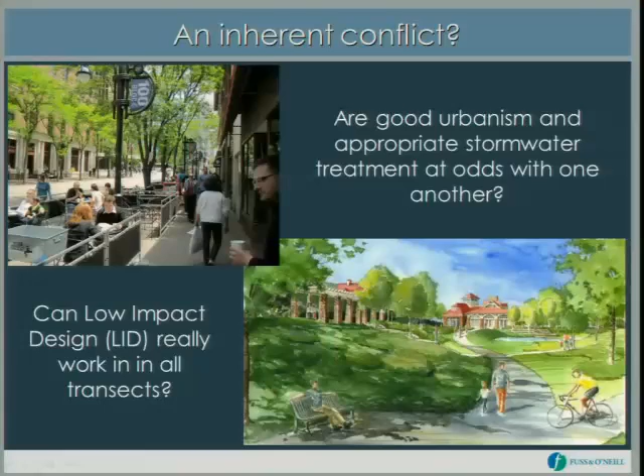So I want to back up a second. I want to make sure that we're all talking about the same thing. When I talk about sustainability, what I mean is that we shouldn't be doing something today that's endangering the ability of future generations to survive. That's really at its most basic tenet what sustainability is about. And in order to do that, there are three things that we have to balance every time. We have to balance the environment. That's the easy one. Everybody thinks sustainability and environment, they go together.

Well, what about the social? That's where the urbanist fabric comes in. That's where the importance of place comes in. Because after all, it is for the people. And then ultimately, the one that's often overlooked is the economics. If it's not economically sustainable, it's not truly sustainable. If we have to keep pumping energy or money into a system, that's not sustainable, and we need to get past that.

So another thing that I think is really critical for people to understand, especially, I teach several classes for young engineers going into the profession, and I always stress to them that if they're in it for the ego, they've picked the wrong profession. Engineers should not be noticed. Our goal is to support the place. Our goal is to provide infrastructure that enables places, but it shouldn't impact the place. It should not make the place worse, and it shouldn't be seen.

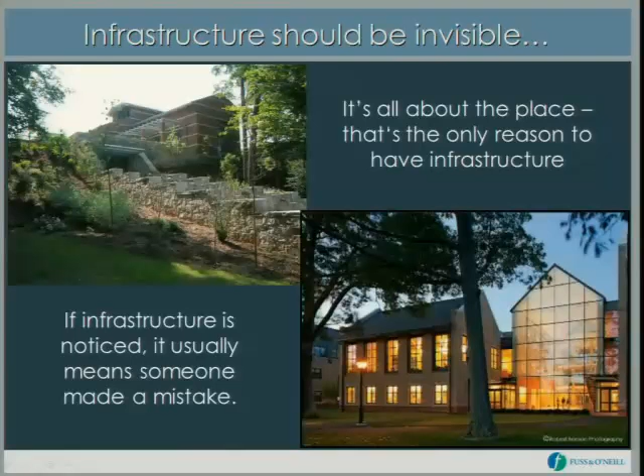Drainage is a wonderful example because how often do you walk in or drive into a parking lot and say, what a beautiful drainage system. That really works well. But on the other hand, if you mess it up and the place is flooded, people say, gee, the engineer screwed up. So the goal of every good engineer should be to not be noticed, and just to help the place to exist.

So what I want to talk a little bit about is retrofitting, because to me this is a lot more challenging, and it's a great place to show creativity, much more so than a greenfield site. Because at a greenfield site you have a lot of options, you have a lot of opportunities. On a retrofit or an infill site, you've already got a lot of things that are not carved in stone necessarily, but they might be built out of stone. And more importantly, the economic factors really start to pile up on you when you're looking at something that's already there. Buildings represent energy and money that was previously spent. It's already there. To be sustainable, we have to recognize that and try to take advantage of it.

The other reason is that we tend to look at things one piece at a time. And this neighborhood that I'm going to be talking about later on is a perfect example. This is a 1940s and 50s development that at the time worked perfectly. They just put water in pipes and sent it somewhere else because that's what people did at the time. Just get rid of it, we're okay. And then more development occurred around them. And that development did the same thing, but they didn't take into account what the impacts to Shendon Valley or Shendon neighborhood were going to be. And the result was that now they have a flooding problem that they never had before.

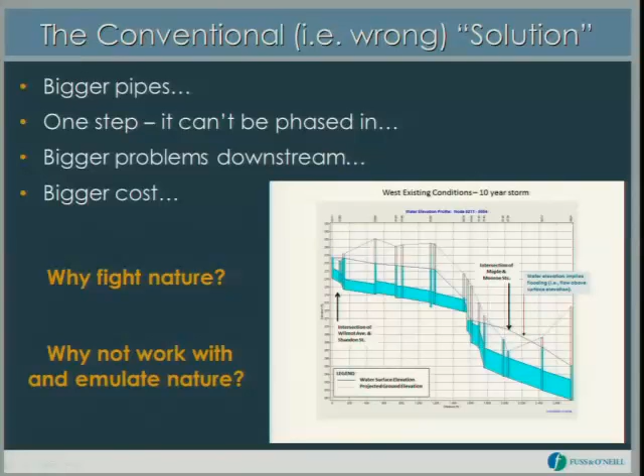So why are we fighting nature? Why aren't we trying to emulate nature? When LID was started, that was what LID was about—finding ways to emulate nature. It's been railroaded into all sorts of things, just like people tried to railroad smart growth into no growth, and we were able to retake that term. We need to retake the LID term.

The very simple reason that all of this matters is this: as you develop a site and add impervious surface, you decrease the amount of infiltration that's occurring. Infiltration, runoff, or evapotranspiration—that's the only way the water's going to go once it falls out of the sky. The same amount of water always falls out of the sky. So where does it go? It either soaks into the ground, it runs off, or it evaporates back up. Those are your only three choices.

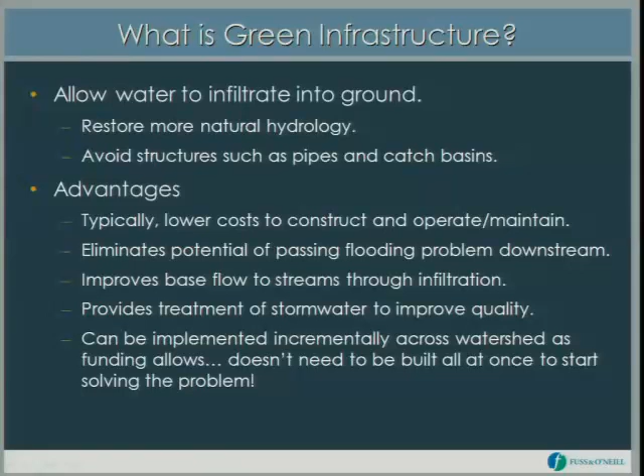So in green infrastructure, what we're really trying to do is restore a more natural hydrology. Now I think the word 'more' is really important to me, because it's not trying to recreate the natural environment—it's trying to find something that operates more naturally. You may use unnatural methods to get there, and that's okay in my book. You should be trying to avoid structures, but that doesn't mean you don't use pipes and structures in certain circumstances where you need to protect the sense of place.

So there are a lot of techniques, and a lot of those you've already heard, so I'm going to skip that. But what we did was look at a project area that was several hundred acres, and we looked at two pilot areas. An engineer who shall remain nameless had already gone into that site and come up with a conventional solution. And we looked at it and said there must be other methods.

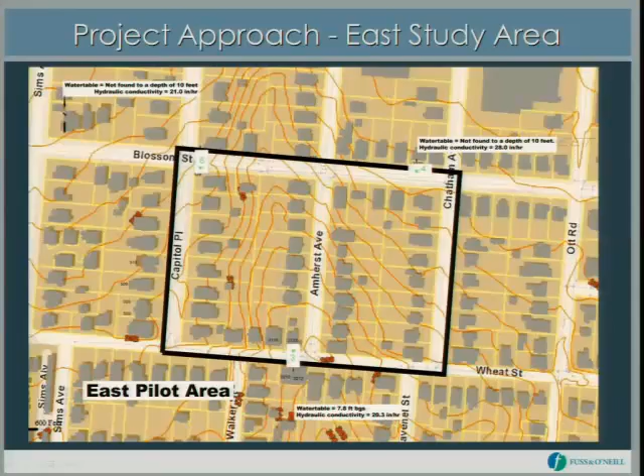We said, what if we do things like permeable pavements? What if we do infiltration? What if we do biofiltration bump-outs and retention? What if we do rain gardens? What if we apply all of these things, and do them in such a way that they're buried, that they're hidden, that they may only change the appearance of the surface through the type of surface treatments—making the pavements look a little different—but we're not changing the character of the place, because this was already a place, and it was very important that we not change it.

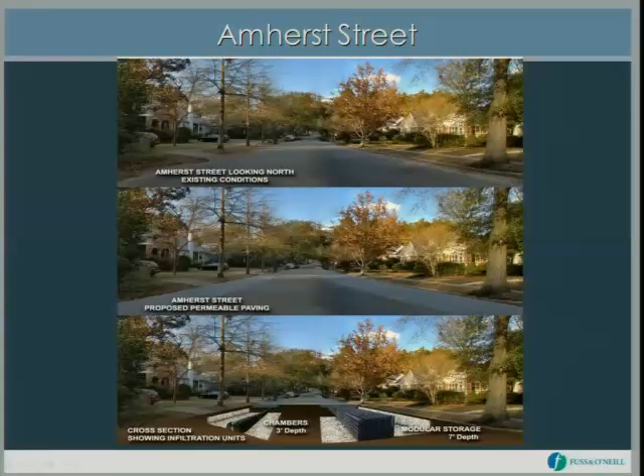So as we went through the areas, we did that. We also planned ahead and said, look, right now we're talking about a retrofit, but what if we want to do additional infill? What if we want to do densification? We can plan for that. It doesn't need to be built today—it can be put in incrementally. That's the beauty of properly done low-impact design or green infrastructure.

So at the end of the day, our pilot costs here came up to something in the neighborhood of $2.5 million. Of course, it wasn't the whole area, so we had to figure out how much we'd have to expand these pilot areas to treat the whole area that the proposed conventional system was supposed to cover.

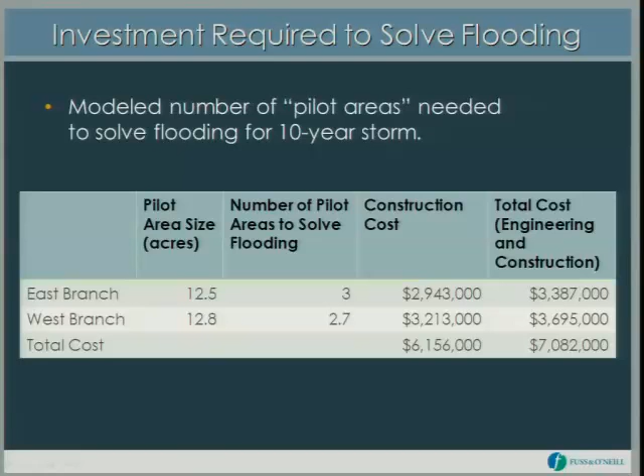Here's what it all comes down to from a bottom line: the conventional system was not going to fix the problem. That wasn't even including the $4 or $5 million in land acquisition, or the fact that it was going to destroy the neighborhood's sense of place and take up all the trees. It was going to cost $12 million. Our solution left the place intact and cost just over half that. And that is all. Great.